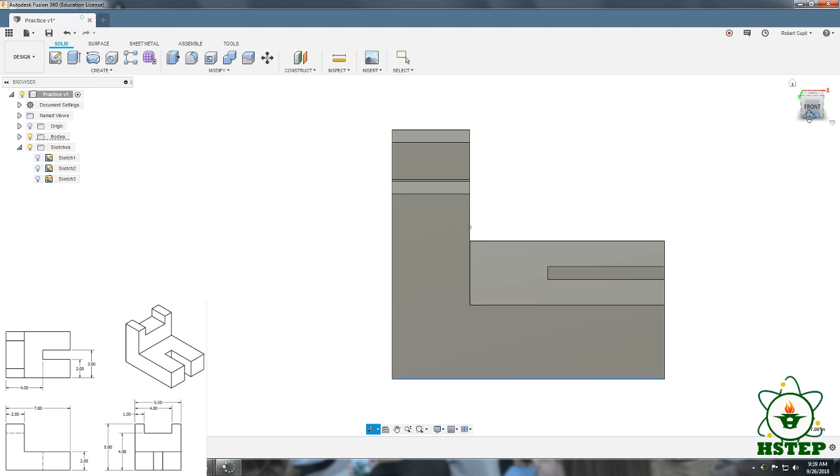As far as the rest of it, if I rotate it on its side, it eventually becomes the top view. And as you see right there, it's all lined up. That's what this image right here is. If I then go back to this piece and then rotate slowly just so that you can see on the front view, okay? This is where all those little squares are coming from. That's where all of this is coming from, okay?

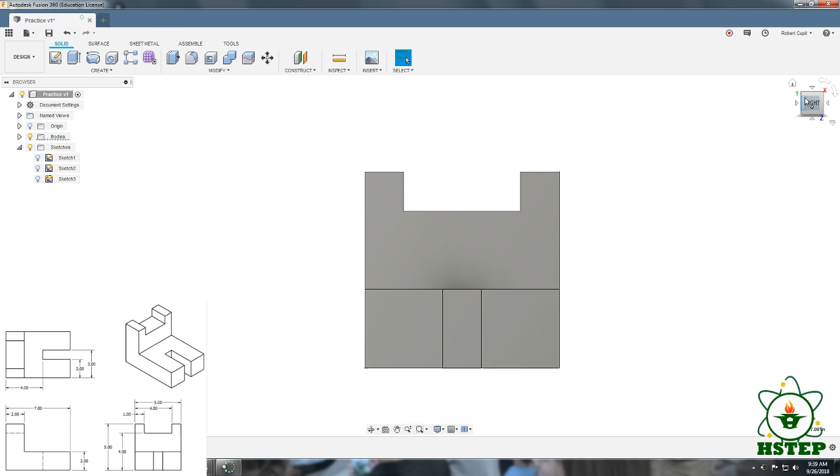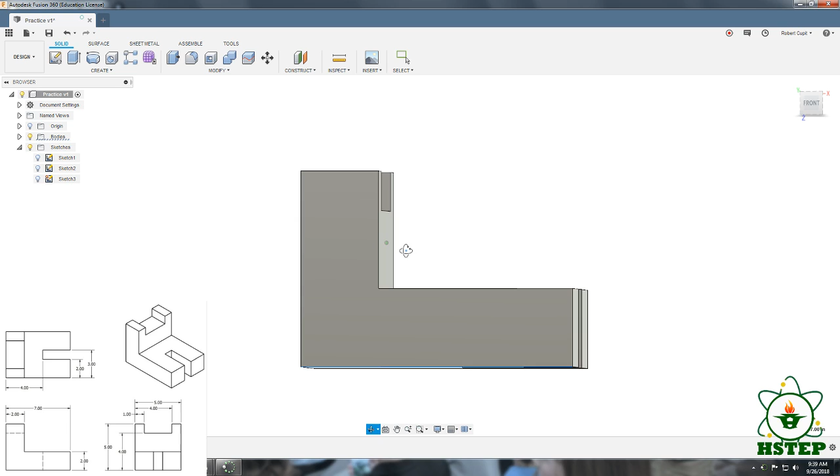So each image that you're going to see, as far as starting with an isometric, you've got to start visualizing where those faces are going to be coming from, okay? That's a good start, but I want you to be able to identify all those parts. Now, a lot of people are asking where these hidden lines are coming from and what the heck they mean. If I go to the front view here and I rotate just a little bit, do you see that this edge is there, right?

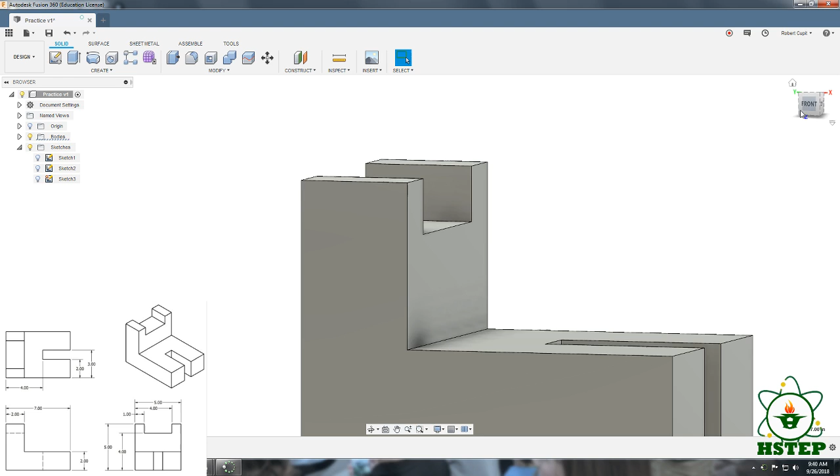This is a surface. It's still there. Just because you can't see it from this front view doesn't mean it's not there. So that hidden line is showing you that that edge is still there, okay? Same thing on the bottom. If you look here on the front and you look right about here, you'll see that there's another edge. There's a surface back here that needs to be identified.

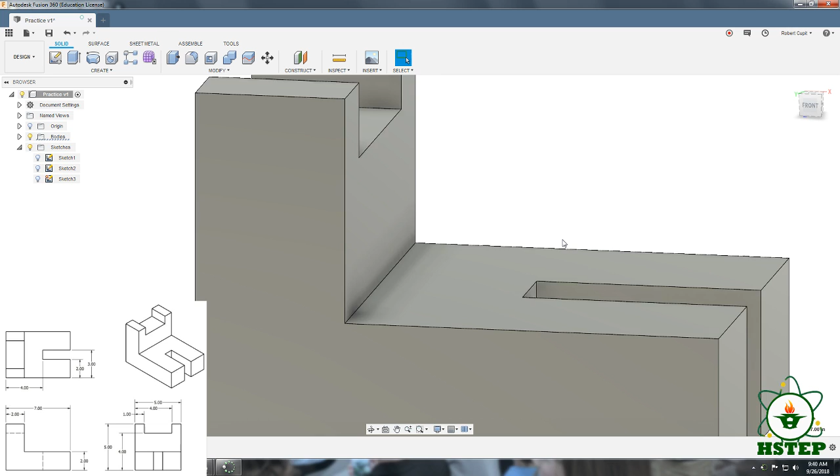And if I even highlight it, it actually shows where the line would be. It goes all the way from the top to the bottom. That's where this hidden line is coming from here. Okay? Are there any questions on where I'm getting all this information from? We good? Okay.

So now I'm going to try and walk you guys through how to actually draw these by yourself. So the first stage that I want to go over is, if you look at my sketches here, you're going to start out in the bottom left corner, okay? You're going to ignore that the top right corner here is going to be the isometric view, because we're going to use that area for more drawing. So we're going to start with just literally a dot in the bottom left corner, okay?

And tell me if you can't see this because I know it's overlaid. I just moved it, so give it a sec. Can you see that dot?

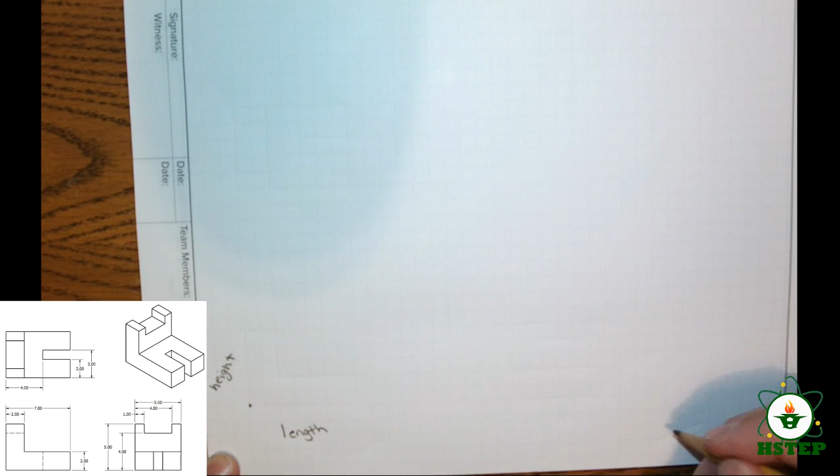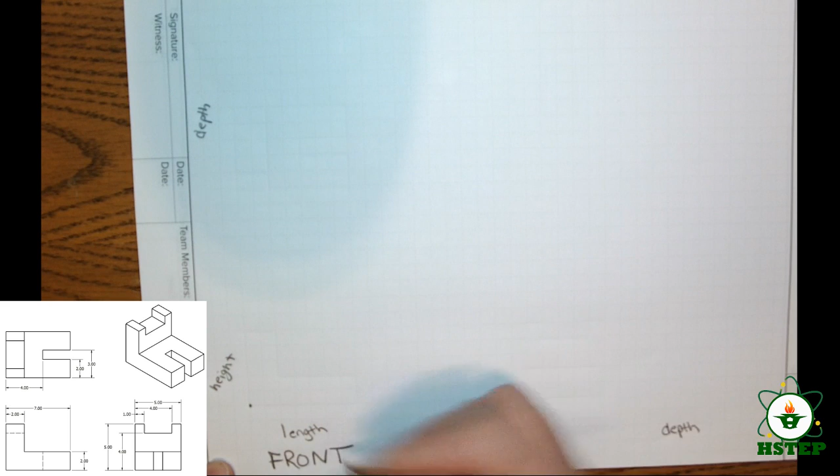Okay, good. So I'm going to start from that dot, and I am going to start with a little review here: length, height, and depth, okay? We talked about it yesterday, and this is supposed to be a little review. Length is here, right? Height is here. And then when you go to this side and this side, it's depth. What view is in the bottom left corner? Front, good. What view is over here? Side. And what's up here? Top. Make sure you can see that. We're good? Okay. So now you have the front view, the top view, and the side view.

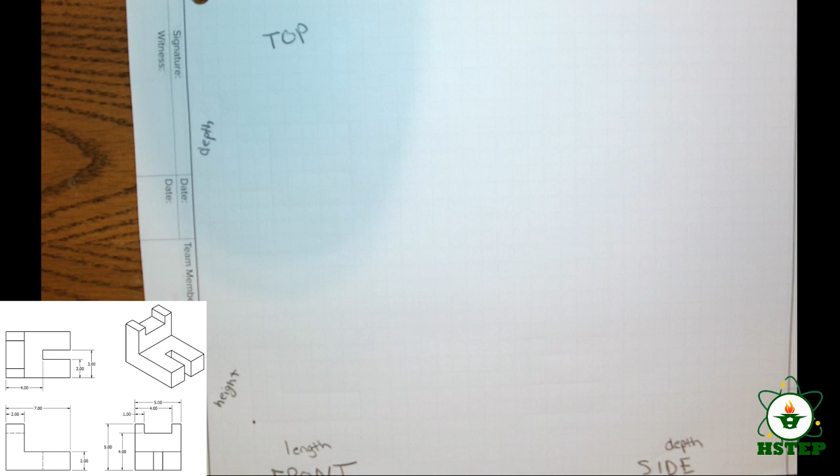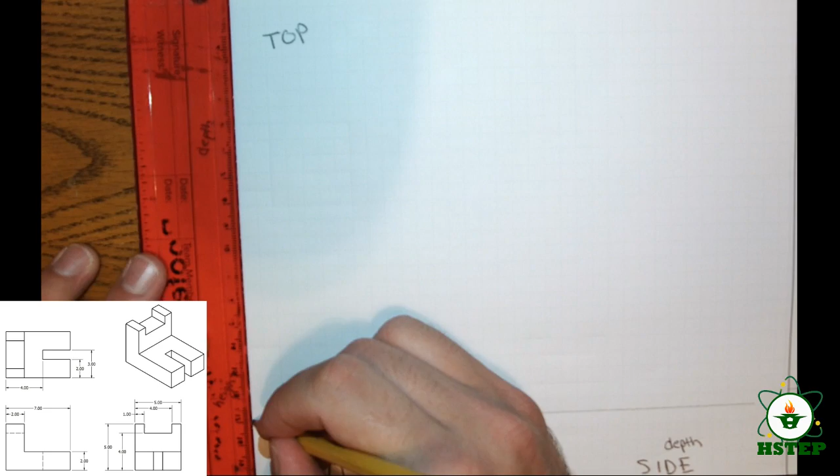We started with this little dot, and now if this is length, how long is this object? We're going to go back and see right here that it shows in this dimension that it is 7. So I'm going to go 1, 2, 3, 4, 5, 6, 7. Make a dot. Every time you make a dot, go up and down and across if you need to. So across and up. I made a dot. And what these construction lines are doing is creating your top and your side view from your front view. Okay? Everybody get where I got that 7 from, right?

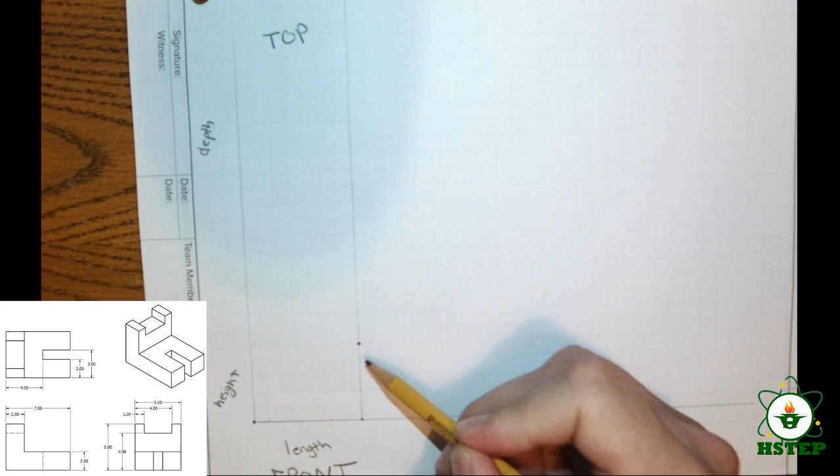Okay, now we need to go in height. How tall is this object? It doesn't say in this drawing, but it's going to say over here that the height is, I can't read that, what does it say? 5. So you go up 1, 2, 3, 4, 5. Do another dot. There's already a line there, so we're good, but I do need to make it left to right. Okay? Do you see how it's creating everything for the other views? Good. This one's already crossed, so we know there's a dot there. Now I have the overall height and the overall length, we're good to go.

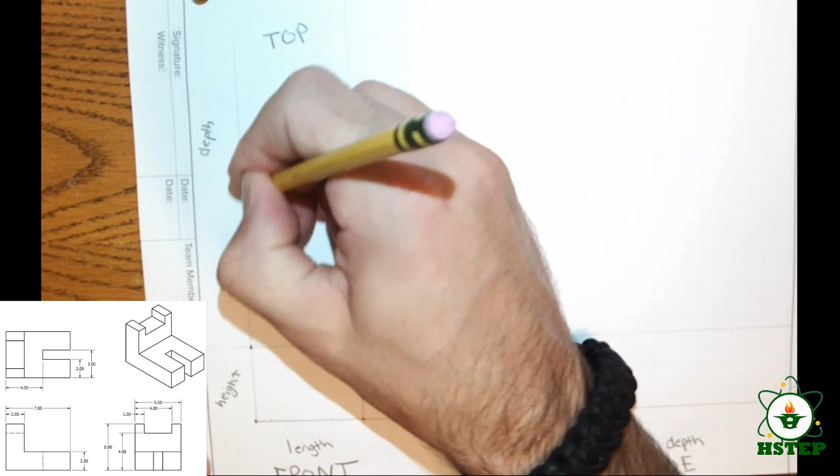That also means that this is also the height over here, and that this is also the length over here. So I'm going to go ahead and make a random dot here, and here, and here, and here. Why there? Just because I know that these are going to match, and I know that this height is going to match. Okay? Because the lines are telling me that they are.

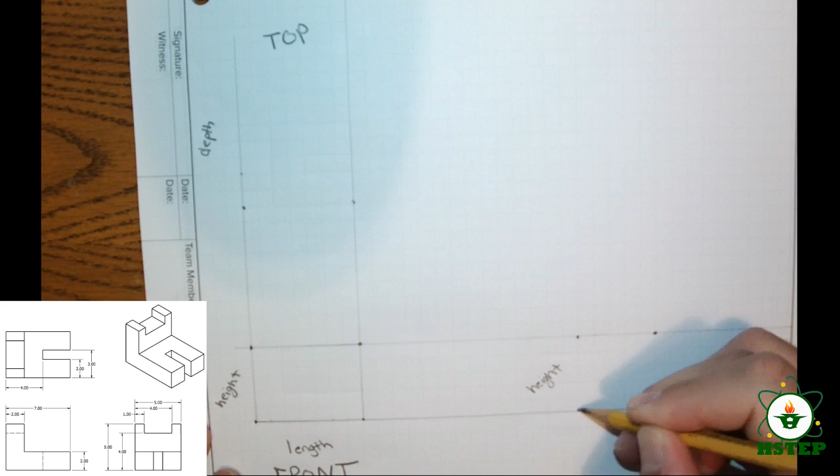Now I need to figure out the depth, and it's going to be the same up here. So if I look up at the drawing, it tells me that the depth is 5, is that right? 1, 2, 3, 4, 5. And again, it's 5 over as well. And I'm just making the overall 1, 2, 3, 4, 5. And 5. And again, I'm going to draw these over, even though there's nothing there, because you're going to use that information later. These ones are supposed to go up.

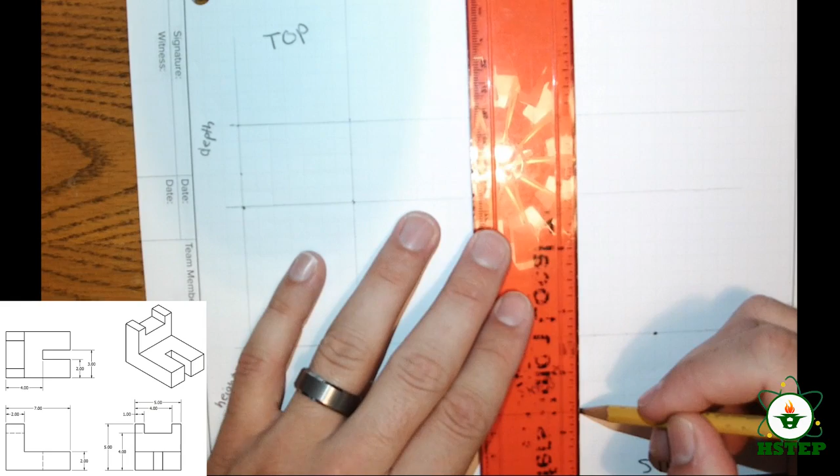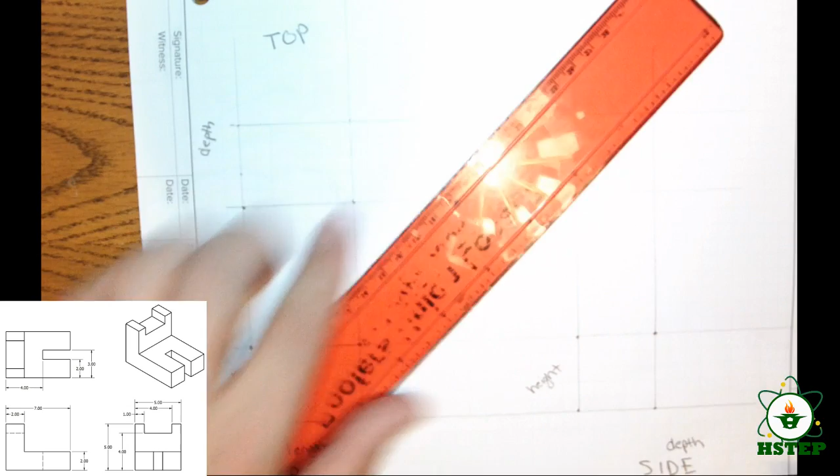Okay, after you have this overall drawing, so I have my overall length, height, depth, you can draw a line that basically goes from corner to corner in this drawing. Okay? That's it. That's the start of the setup. Now you have depth, now you have height. What we're going to do eventually is make basically all these corners.

How much time do we have left? We're out of here at 55, huh? I got 10 minutes.

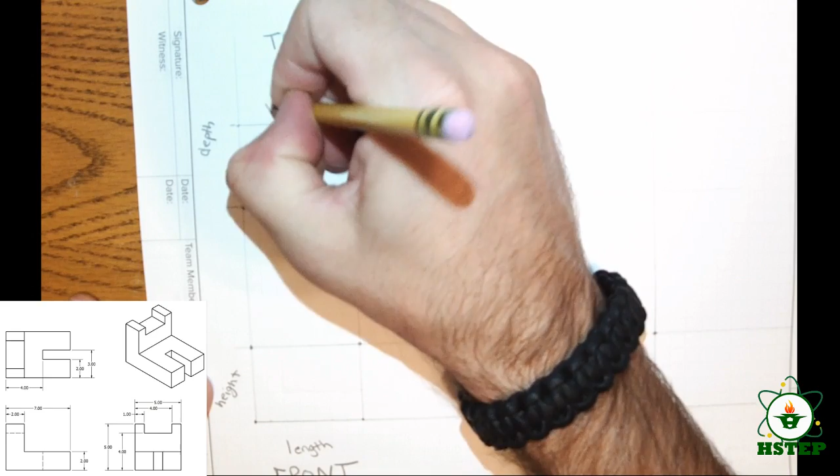So I'm gonna start with the dots. Does everyone see where I got the heights and this depth? Does everyone see where I got all those overall? Yes? No? Okay, good. So if you have all that, you got the hard part done. Now we have the overall height, overall length, overall depth, right?

Using this information, now we're going to start making the actual views. Let's always start with the front view because I like that view. It makes it easier to start with. So if I look at the drawing here, it says that it goes over 2. 1, 2. And I'm just literally going to draw the outline.

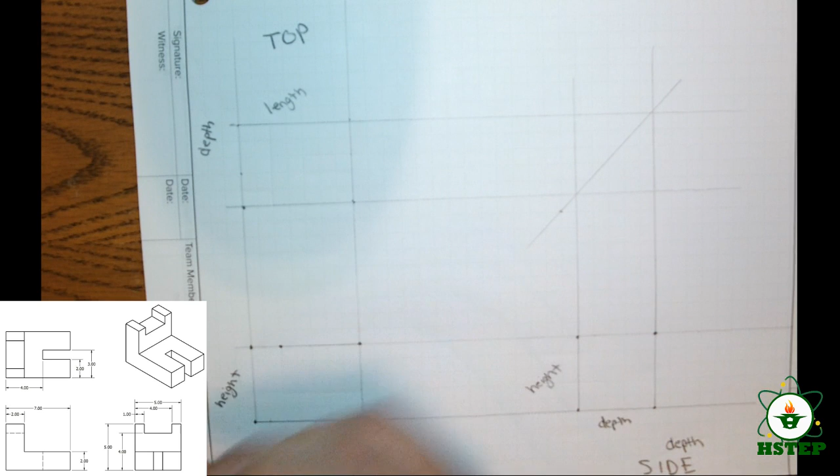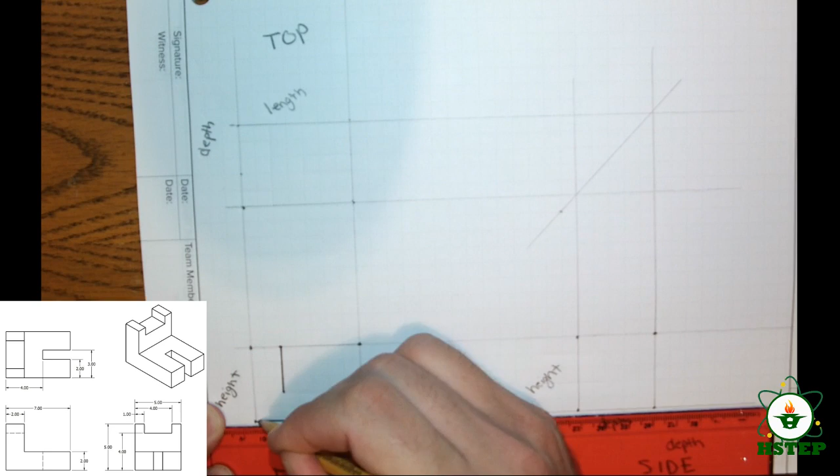It says it goes up to here. 1, 2. Where these meet basically goes there. And now I can darken those in because I know that those are the edges, those are the object lines that are going to be created. Basically, once you get the outline and once you get the dots, it's connecting the dots.

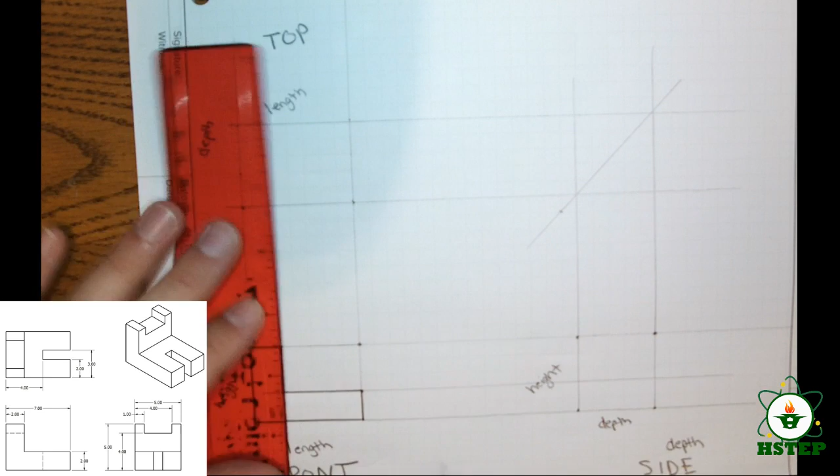Okay? Every time you make an object line or a new line, though, just like I said before, those dots need to project. That one's already done. This one can also project. Every time you make a line, a dot, project it. Okay? If you start to look, now these objects are even being drawn by themselves just by projecting those lines and those edges up. It makes it a lot easier for you eventually.

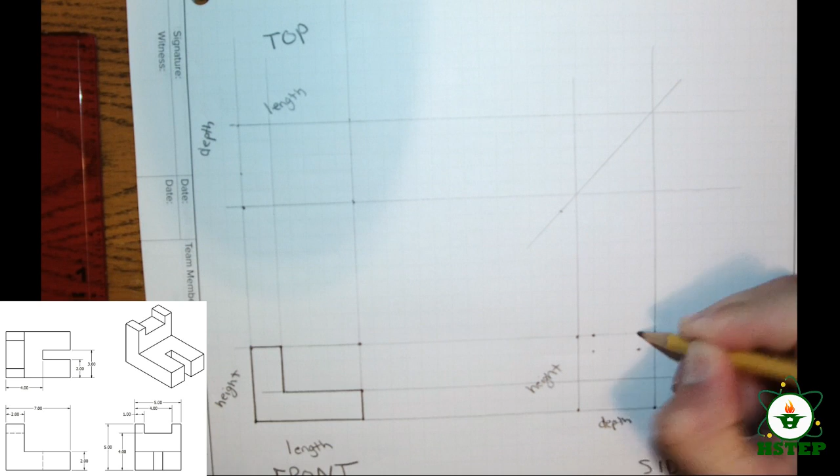Okay? So let's go to the right side first. If you look at the drawing, it says you go over 1 dot. It says you go down; it doesn't say, but it says that the whole row is 5, and this is 4, so what you're left with is 1. It says to go over 3, 1, 2, 3, back up 1.

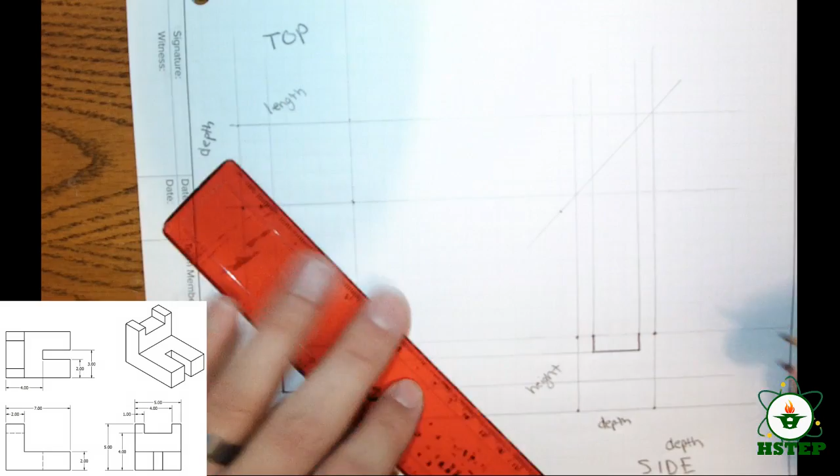And now again, I have these thick lines here, and again I can project over. I have this thick line here, and again I can project up. Okay, I think I'm good there. I'm going to go ahead and color these outside lines in because I know that those exist to complete this portion. Everybody with me so far?

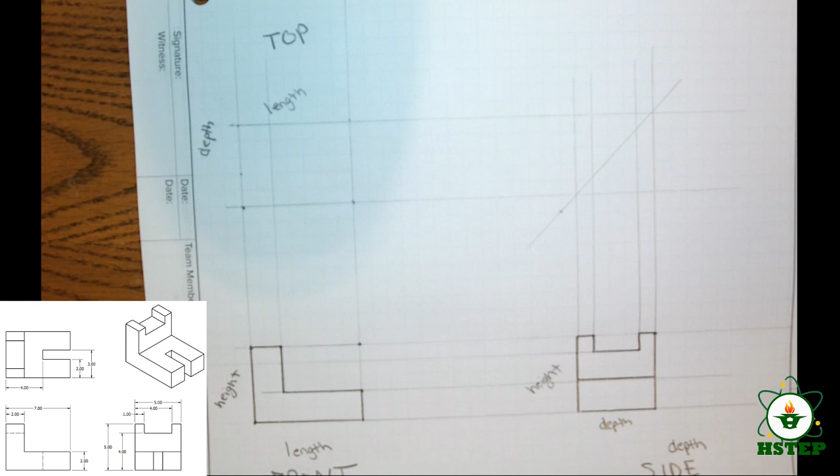Okay. When they cross, and this is where I'm going to get to a point, this is a line too, right? If you look at the isometric, I'm missing this gap here. I don't know where these lines are at. And they're actually identified in the top view here, which makes it a little bit difficult. So I'm going to do it in the top view just so it's easier. Use what you're given. It says 2, I think, right? Yes. Goes up 2 here.

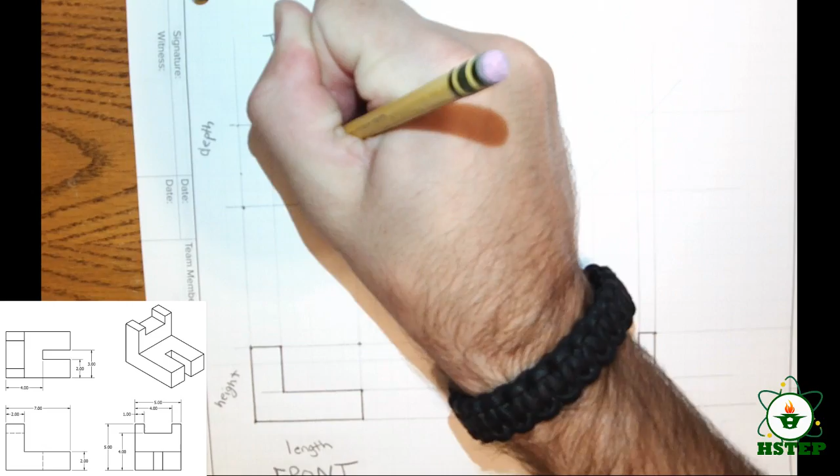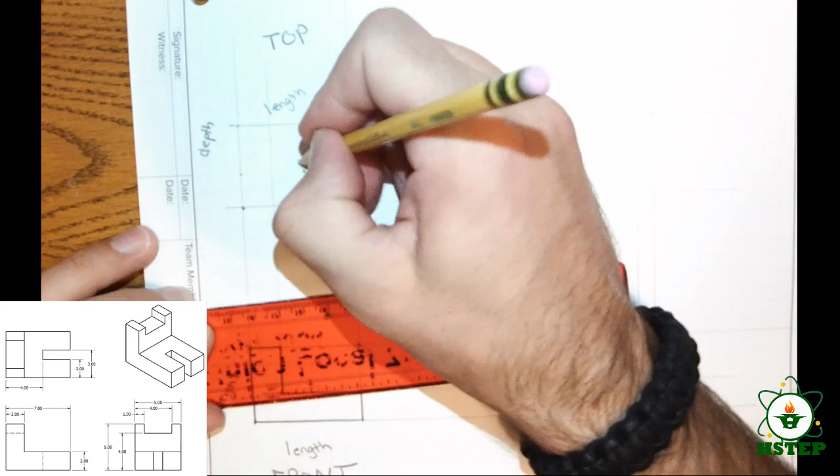And then as you can see in this other drawing, it goes back here; is that 4? Yeah. So that means that this depth is 3. 1, 2, 3, because it was 7 all the way across. Goes over 1, goes back here, and now again I have my little gap right here. But because I made a gap, and because I made a line or a dot, I need to project.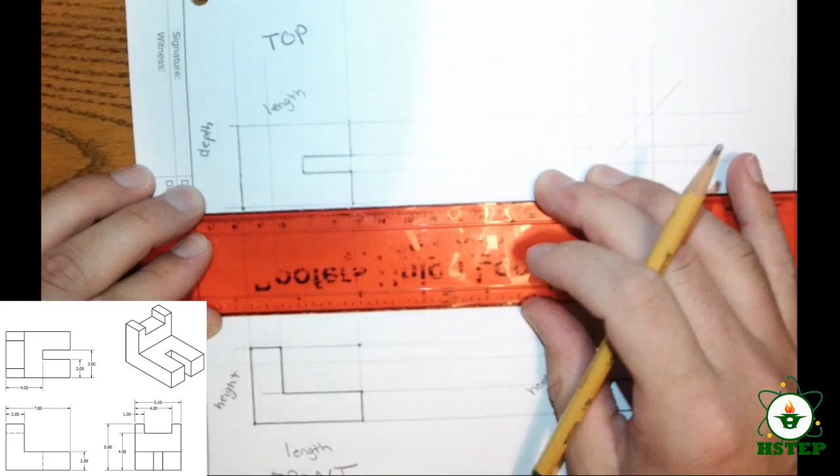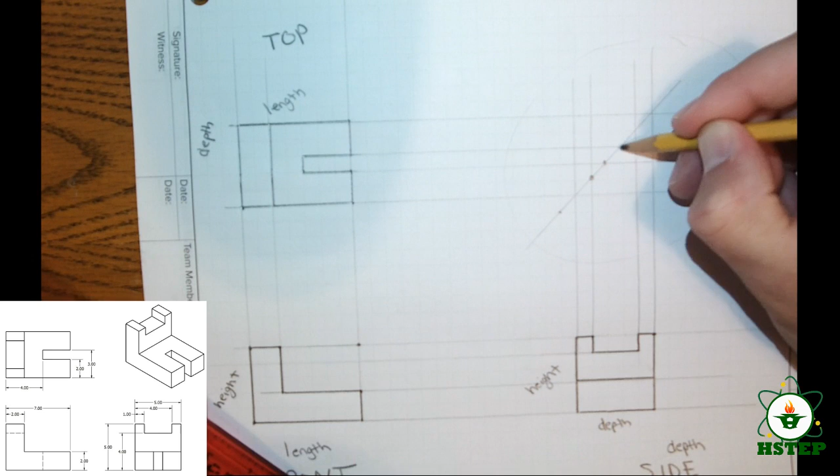Okay. I can make these dark lines as well, and I'm almost done completely with my first multi-view sketch. Now I'm missing some aspects, and we're going to talk about those. People are questioning what this all is right here. Wherever you project up, see this dot where they cross that line? Here, here, here, and here. It's referencing something down here.

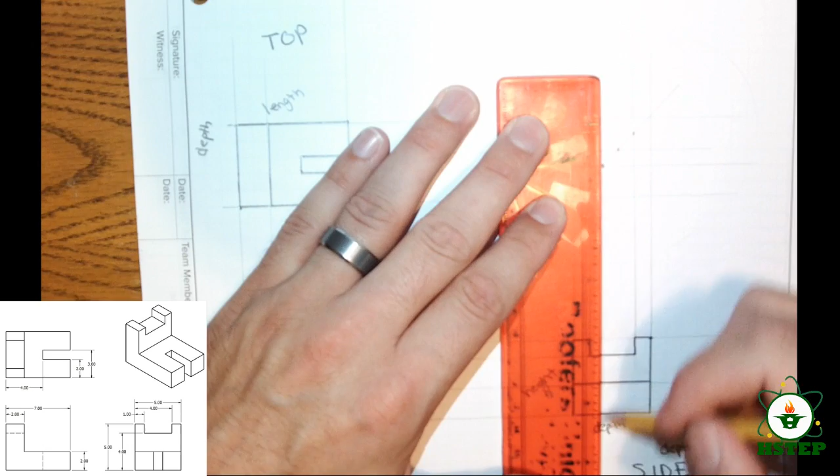Well, this dot already has an edge, so I know it references that. These reference the top and right side views. This dot already has a line that goes down to here. Does this one have a line that goes down to here? No. So I made a new dot. I need to make a new thing. And without even measuring, I can see that now it made those 2 lines that I needed to finish that drawing. These 2 dots that don't have a line going over here created those 2 lines that I needed right there.

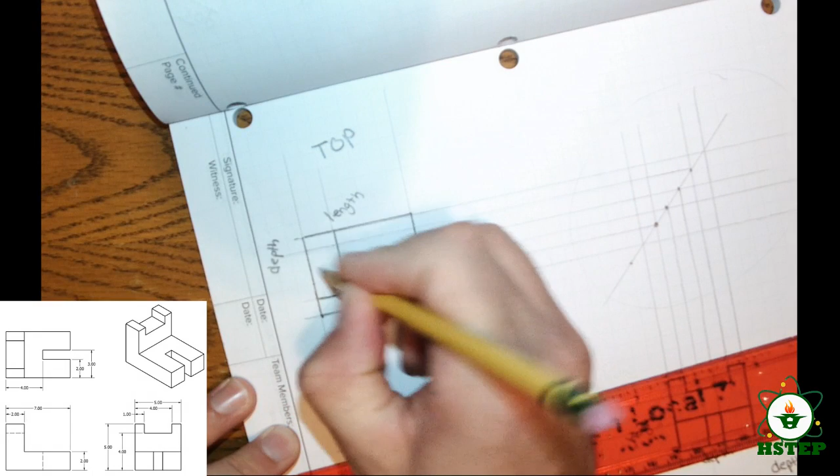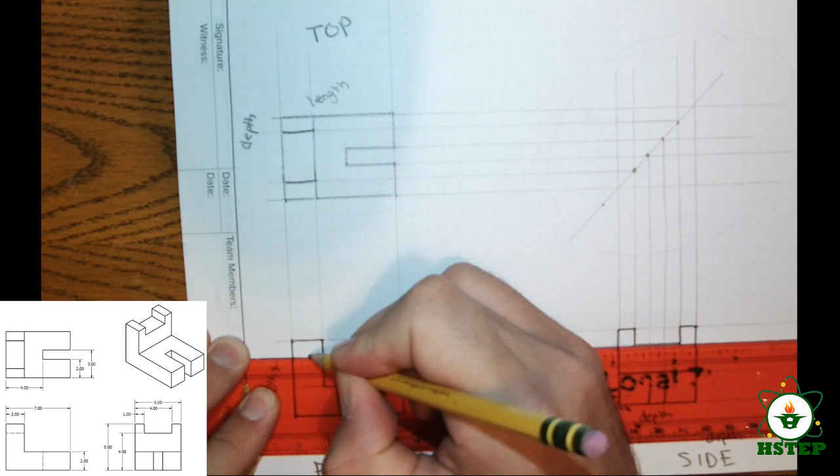Now, the last couple pieces are the hidden lines. You can't see this edge in this view because it's hidden. You can't see this edge in this view, but it's still there because it's hidden. And now the drawing is completely done. Any questions or concerns on how I made all of it? Okay, so you're going to have plenty of practice, trust me. I'm going to stop the stream just so you guys can see.